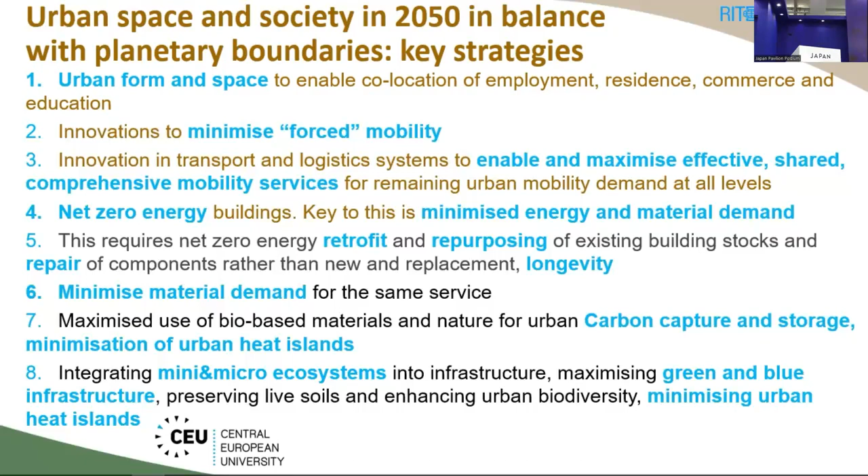So these 8, if we manage to implement this, we will live much better in cities, we will have much more social inclusion in 2050, and we will be balanced with planetary boundaries in developing country cities. So now let me jump into actually the key messages related to buildings, because that's my special area of expertise.

And we've done a lot of work thanks to the EDITS project, which also made it very highly into the IPCC report. For example, this is a big review paper that EDITS helped us to do. And the key message of this is actually also the key message of the IPCC buildings chapter. Yes, it's coming now. So the important thing is net zero energy buildings. And I'm not talking about net zero carbon, because the important thing is to minimize also energy.

So net zero energy buildings are feasible in all climates and are economic for almost all building types, both for new and retrofit. And that is very important, because before that we thought, oh, you cannot do it here and there. No, you can actually do it, and it's mostly economic. And we have shown it through many examples, and there's a lot of evidence. But it requires retrofit and repair and repurposing. As we have said, repurposing comes up in the IPCC report also.

So let me now show why I'm saying that net zero requires the minimization of demand. And that we often forget, because with net zero, we just stick a lot of solar panels on the roof. For example, here in this conference, this building is with solar panels. Yes, but we forget that maybe if we wouldn't set the thermostat so low, then actually we would not have to sit here in jackets and pullovers and scarves and so on. And that also is important.

So that was the old building, and this is now the energy positive building, which is now kind of a 21st century power plant, producing more energy than consuming. But in the end, I wasn't that stupid to say that, because before the retrofit, it was consuming more than 800 kilowatt hours per square meter per year. It can only produce, even with the most innovative design, only about 60 kilowatt hours per square meter per year

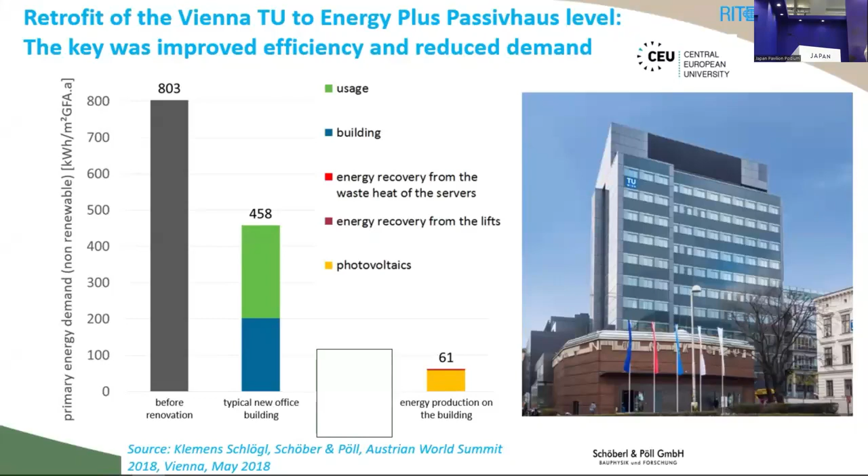with photovoltaics. Even a very efficient typical new office building in Vienna consumes 458 kilowatt hours per square meter per year. So this is still almost 10 times bigger than this. So I wasn't that stupid. But still, let's see what the engineers have done, or what was the trick to still making net zero. So this is the 450, which is a typical Austrian office building with a lot of uses. Don't worry what it means. It's simply all the kinds of things that we do in a commercial building.

And this is what they have done. They have optimized all of these, 9,300 components. This is not rocket science. There wasn't anything fancy, big technology. It's simply looking at all the coffee machines and all the elevators, all the security systems. And as a result, they could reduce the energy consumption by 90%.

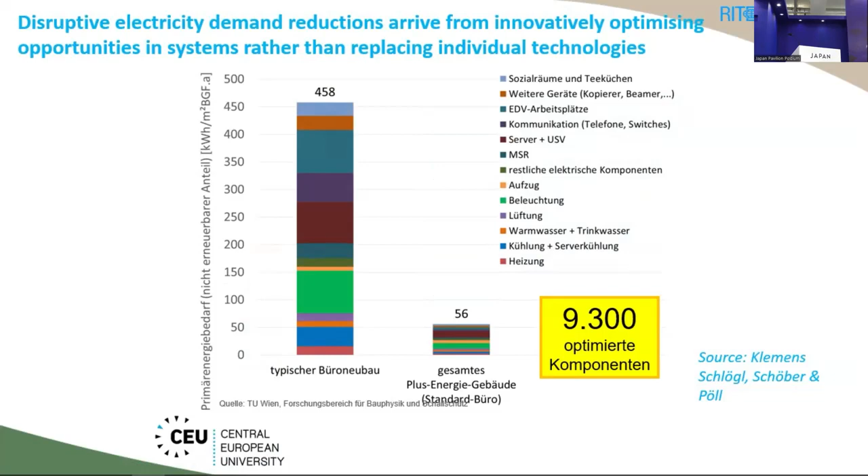Once you do that, 56 is less than 61. So with this major energy demand reduction, they managed to make an energy positive building. And this is, I think, generally true for net zero in the climate era as well, because to reach net zero goals, we really need to reduce demand drastically.

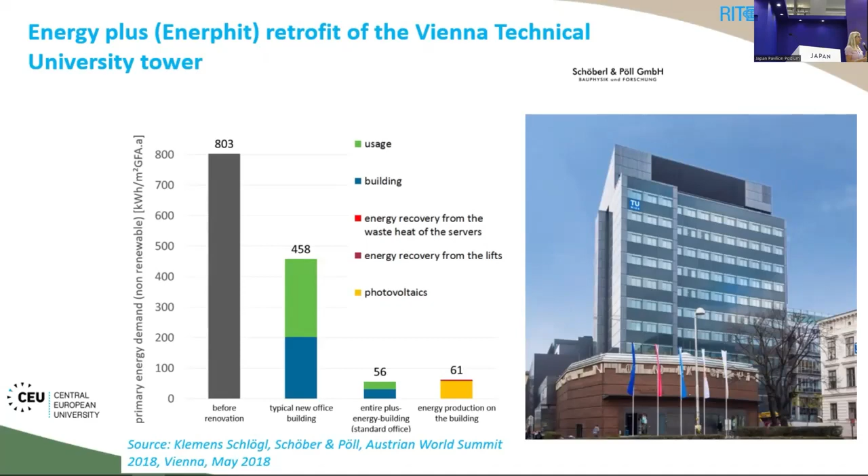And this example shows that, yes, you can reduce demand without actually affecting the service. The students still get exactly the same luxury, in fact a much healthier indoor environment. So yes, doing more for less, as the EDITS scenarios and narrative go, is absolutely possible. And this is an example. And it's absolutely essential, especially for the low income.

This is a passive house in Budapest. Now we have a major energy crisis. We are next to Ukraine. We are not getting natural gas. And everybody is really worried about the winter, how we can survive, how we can pay our energy bills. Now they will have no problem.

This is a social housing in Budapest. They will have no problem, because even if their gas bills go up 10 times, they still pay very little, because they spend just about 10 euros or something like that per month for the heating bills, because it's a passive house. But of course, often the argument is, okay, but it costs a lot.

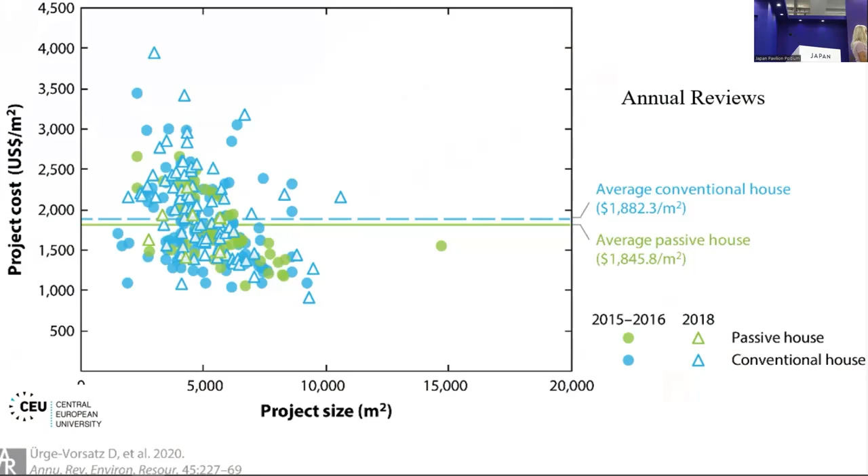No, we have also shown, thanks to the EDITS project, we got a lot of evidence, and from the actual professional literature, that passive house level construction can cost even less on average than regular construction. So no, it is not going to cost more. So more with less can be even economic.

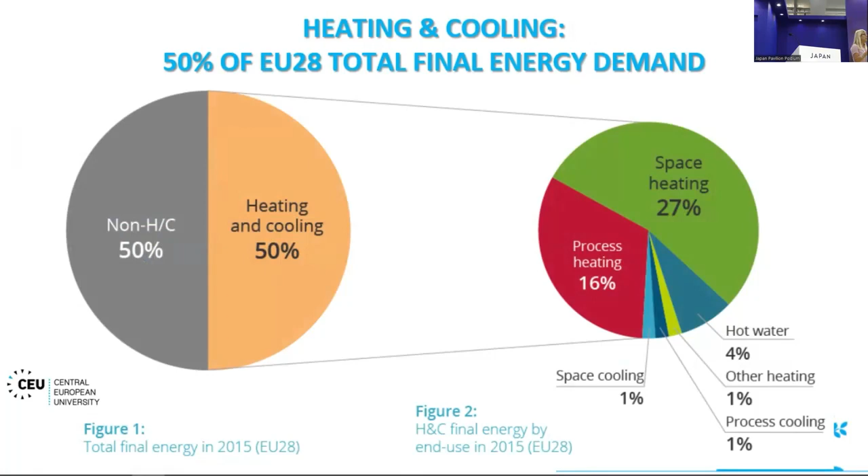And what's really important, we only talk about kilowatt hours and fuels and gas and oil, but we don't talk about what it is used for. In Europe, half of all final energy demand is for heating and cooling, and most of that is for space heating. We don't need all of that. In Europe we don't have so much cooling needs as in Japan; we have many heating needs. In a passive house, you practically don't need any heating.

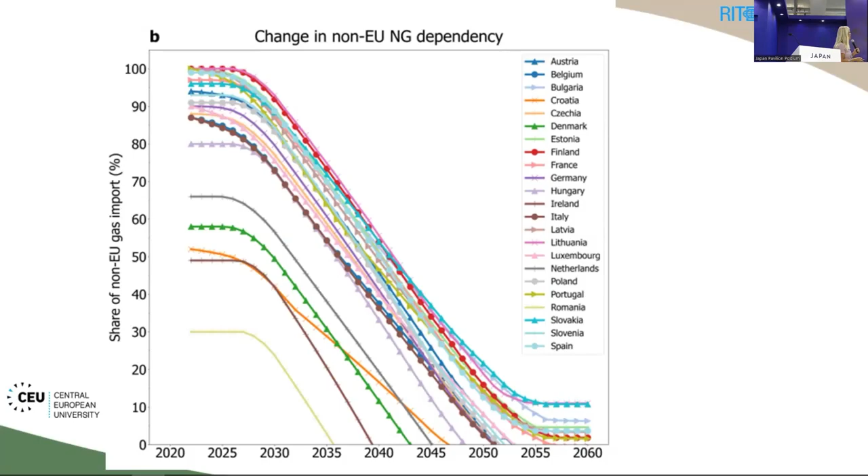So with upscaling the case studies I have shown before, this is our model thanks to the EDITS project. What we are showing here is that just upscaling these types of buildings and retrofits, most European countries get rid of any imported natural gas by the 2040s. So we don't need LNG terminals. Of course, you have to bridge this period, but this could be steeper. This is just a very leisurely rate of retrofit. So even the energy security benefit is very high as a result of more for less.

You can actually reduce building energy demand despite the tripling of floor space by over 50%. As opposed to the interim scenarios of the NDCs, which roughly imply an increase of 30%.

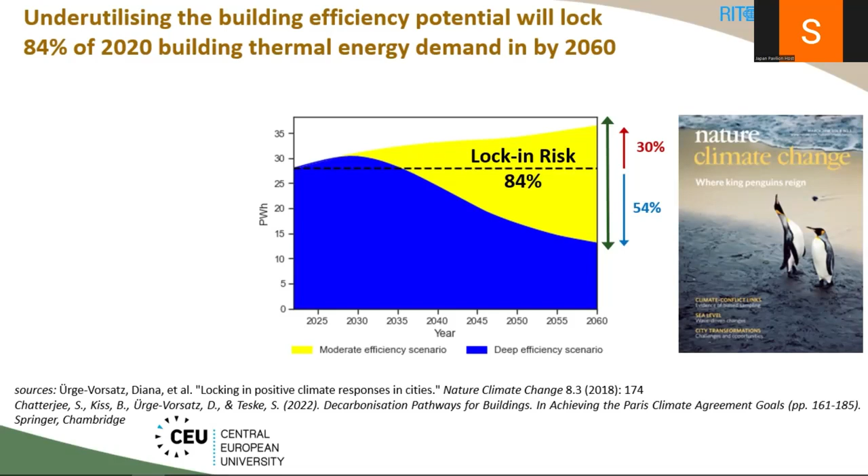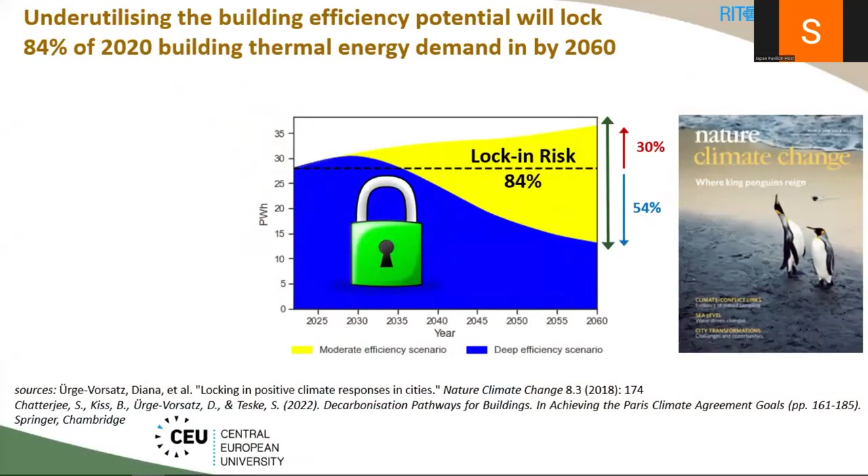But the problem is, because buildings live for a long time, there is a very big lock-in risk. Every building that we build or retrofit today to less than a net zero future level locks us out of carbon neutrality or a net zero building energy sector by the middle of the century, because our building emissions in 2050 or 2060 are determined by how we build and retrofit our buildings today. That's the lock-in risk, which we also warned about in this Nature Climate Change publication.

So finally, what I have shown through just a few examples is that there is a broad spectrum of opportunities that can make cities more livable, increase social inclusion, social cohesion and well-being, as Joyashree's chapter shows really well, and increase local economic activity.

So yes, we can at the same time really do better for less. Thank you very much for your attention. And that's a party, because we can live much better for less.